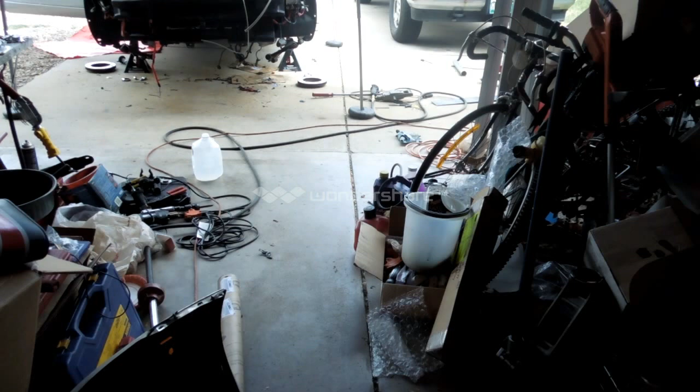So let's start getting the engine off the stand and get the rear main and everything sorted. But first I've got to clear a path, because as you can see the engine stand isn't going to get through this very well. I'll work on making a path and be right back.

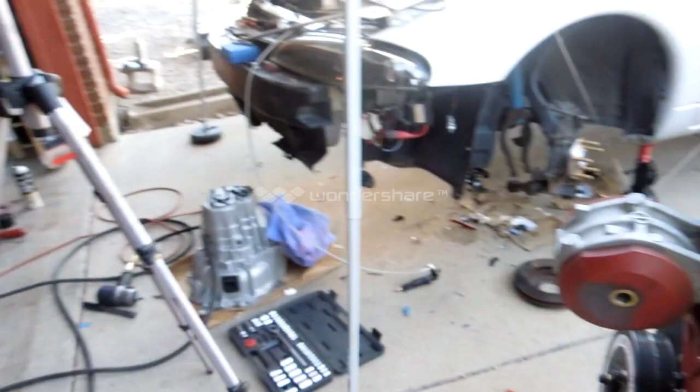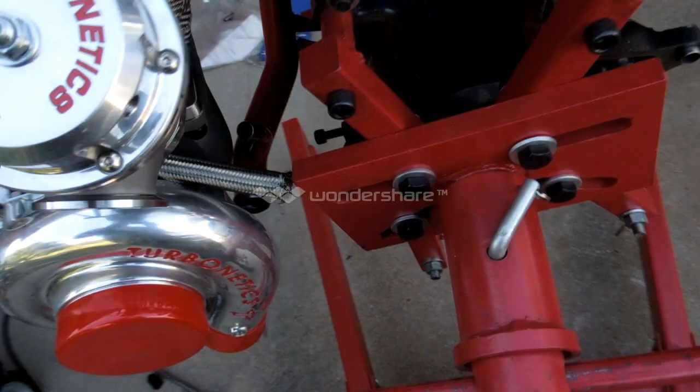Alright, it's 5:08 in the afternoon. I got the engine out here outside. I went through and did some things for the turbo, cleaned out the lines from when I made them so there's no debris, and started making the drain. I'm going to tighten or snug up the bolts for the turbo to the manifold for right now, just dropping the manifold in as an assembly as it sits. I also did some work on the vacuum line since it's going to be under pressure, adding one-way check valves here and another one for the brake booster.

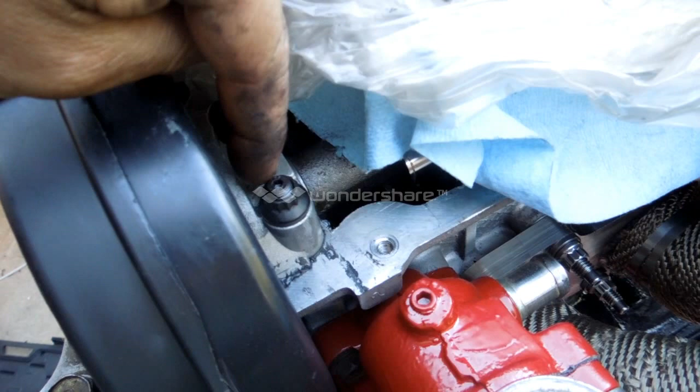What else did I do? I made sure and rechecked the tightness of all the cam tower studs. I remember I had helicoiled this one, and I wanted to make sure I torqued it to 20. The book says 21, but at 21.5 foot-pounds it started to slip, so I'm going to leave it be.

I've got to take the alternator off the other engine, and make sure the cam gear bolts here are tight. I did retorque and put Loctite on the main bolts, these two here, but I still need to recheck the other ones, which I haven't done yet.

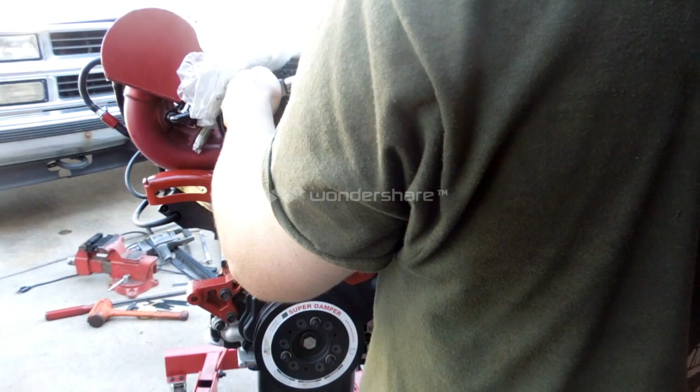I want to make sure this engine's right. The book calls for 15 foot-pounds. Looky-loo, it's a smaller one. These are 12 points, I think they're 8s, yep, they're 8s. So 15 foot-pounds, and there's 5 of these. They prevent the cam from slipping. Ooh, that one was loose. Okay.

Building a motor like this, always double check your tightness, especially on some parts before you put the motor in. I'm going to double check the head bolts to make sure those are tight. I put the mount on here from the other engine. I'm going to have to rotate this a little bit just to get that other one into clearance. There, okay, we're good.

Always recheck them, I'll have to check the tightness every now and then. The reason being, if you remember from part 23 when I did the timing, I cut the valve cover out so I can get the cam gears changed timing if I need to. But the other reason I did this is so I can keep the timing cover on. Forgive me, I said valve cover, I meant timing cover, I'm losing my focus. It's getting later in the day and I really want to get this in. Timing cover, because I don't want any rocks getting up in there and messing with stuff. So I did it this way, and it'll work nice for now.

I had to make a stud from a bolt I had for the turbo, because right here I can't get an Allen key in there with a ball head on it very well. So what I did is cut the head off, put red high-temp Loctite on it, and snug that up close to what it should be. The book says 23 foot-pounds for the turbo model, plus 65 degrees, but since these aren't torque-to-yield bolts, I'll probably go 25 and see how it feels.

That's pretty much where we stand. I'm getting ready to take the manifold off, set it aside, and then get the transmission over here. I also don't have the exhaust gasket in here either, so I'm going to have to do that as well.

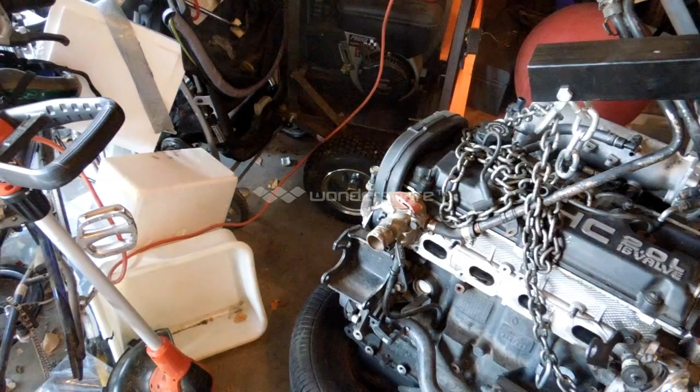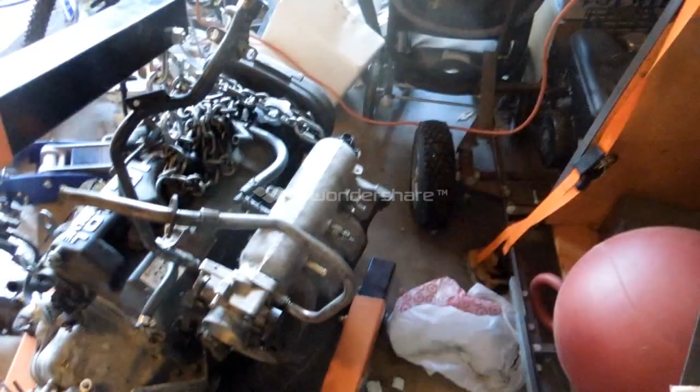Okay, so now I'm going to work on getting the alternator. So we're going to go over here. Not a very good angle. Okay, there we go.

I'm gonna need it's like a 12 or 13 ish. And right on a 13.

Okay, I'm going to have to take this sliding piece too out of this one. Belt to loosen. Nope, it's in there. Okay.

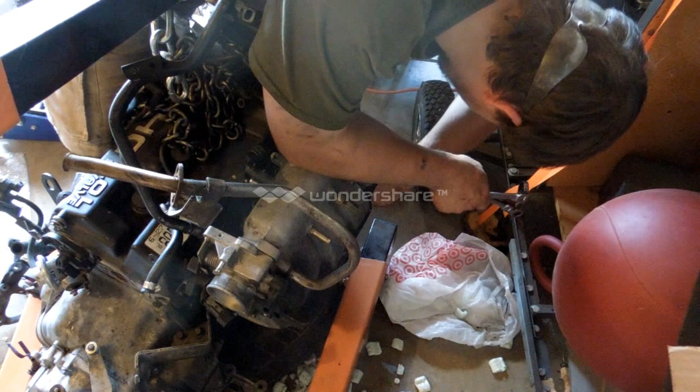Come back here, I need you. Alright, well, I'm going to focus on this other nut down here. He said nut. Mechanic joke.

That sucker's in there. Go away, Wolverine, go away.

There we go. There's one piece I need. Okay. Zap that off.

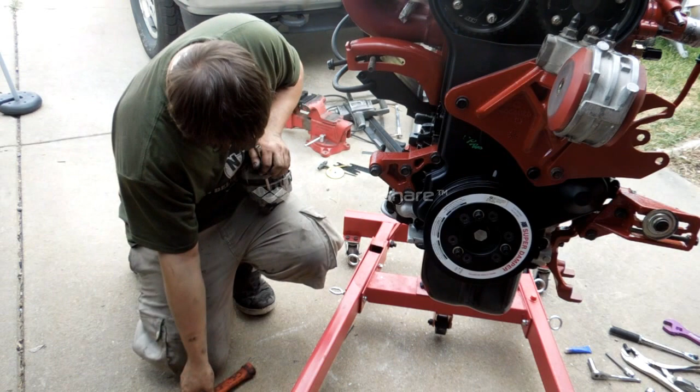I'm just gonna be careful with it because I don't want to break off the positive wire to the battery. There, that's far enough.

You see, it just fits right in there. I don't have to fight it. The only thing I probably might end up fighting is this. Nope, not even. I gave up without a fight.

There we go, there's the alternator. Just gotta snug these up. I'm gonna put the belt on now since I have a chance, I just gotta go get it. Go. Alright, I'll be right back.

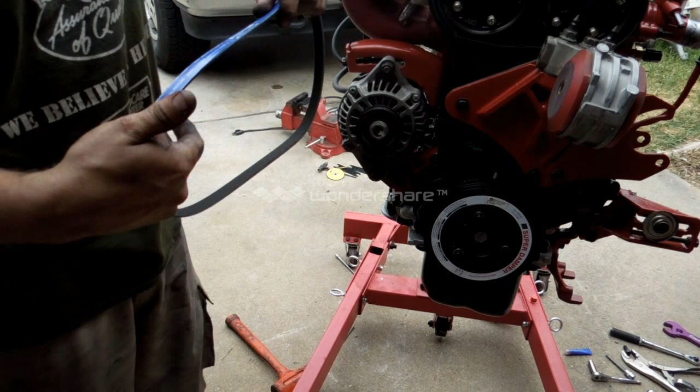Alright, got a Gates Kevlar racing belt here, much stronger. So this should fit, and the crank pulley is actually underdriven. At least it should be, unless I grabbed the wrong one. Let me check with the other one.

Gimme. No, identical. So, belt's too long now, by yay much. Ain't that pleasant.

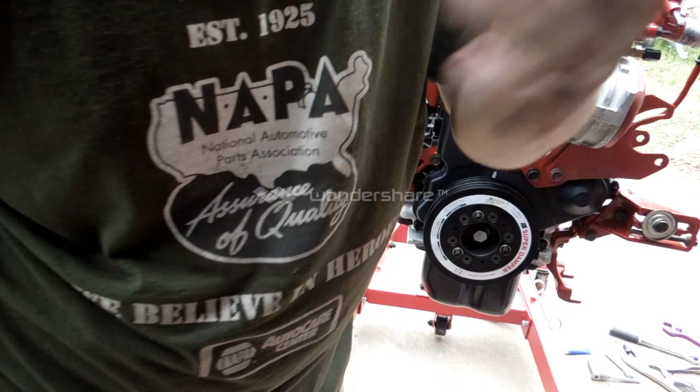What's next? What is next? Alright, I'm just gonna work out this. I'll be back. Okay, time to put the motor in. It's time to do this.

Em, can I get you to stay on this, please? Please? Stay on it, please stay standing on it. It's just to help balance the weight out on it.

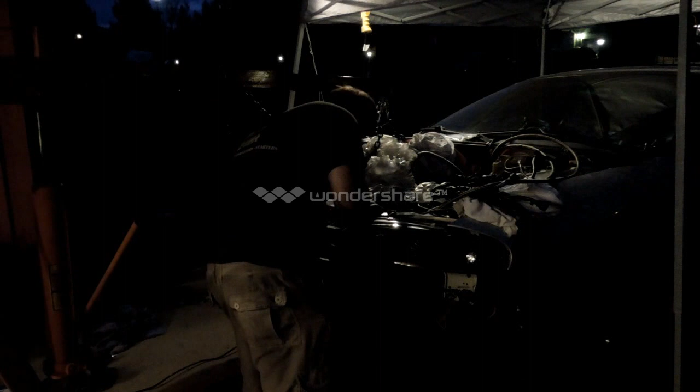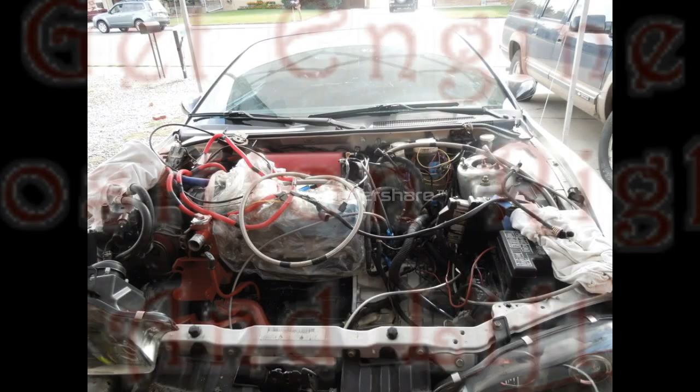It's Saturday, August 7th. I was up real late last night putting the motor in. I finally got it in. I've got to go around and tighten the bolts on the mounts more. Couldn't use the impact, it was like 11 o'clock at night, so it's in. I've got some loose ends I need to button up. Pretty much today it's going to be the valve cover, ignition coil, battery, starter, cross member. I've got to go find a different belt for the alternator so I can have at least a charging system for now.

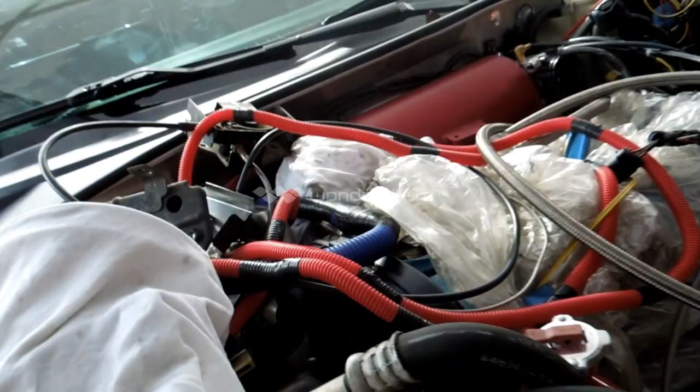I ran into a snag and the manifold was hitting. You can see where it was hitting, the cable box for cruise control.

But the video where I put the clutch on is gone. Battery exhaustion, and then it said no file, no image on file, so I'm not happy about that.

I guess we'll just have to get to it. There's some vacuum lines that need to be hooked up, need to get those done here. Alright, we'll just have to get to it.

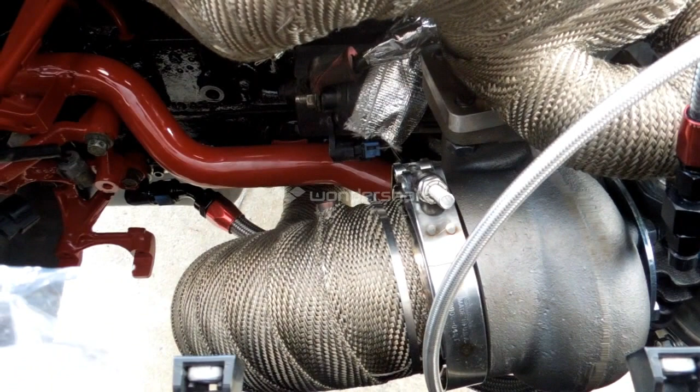Alright guys, it's the afternoon of Saturday. I've got the turbo on, mounted, bolts are torqued. Figured out a way to do oil drain without doing the sump pump, but we'll see what that does. It should work, hopefully, because there's not much resistance and there is a slight slope to it, so that should help.

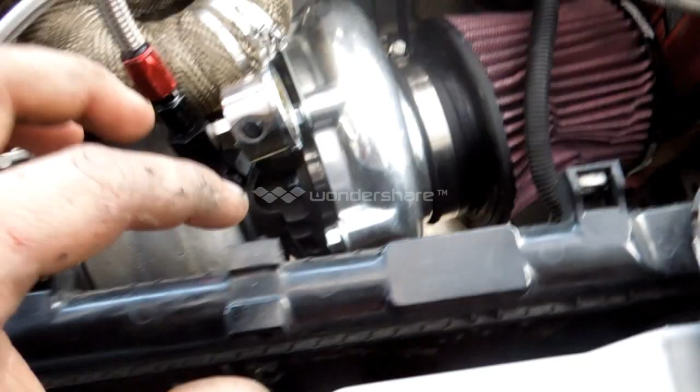I have to go back to the factory radiator. I was going to use a Mishimoto radiator, but the core was about yay big, and it wouldn't sit down in the mounts, bottom mounts at all. So I'm not happy about it. I specifically told the guy who made the manifold that I'm using a 3-row core, so I don't get why that wasn't taken into account. Then again, he's really forgetful, so I think that'll be the last time I ever use him.

I've got the air dam off and trying to fit up the radiator fans. I get one on the driver's side, but the passenger side I can't, I gotta get a smaller one. Pretty much this is a dead in the hole project right now until I can get different parts, trade off some parts or something like that.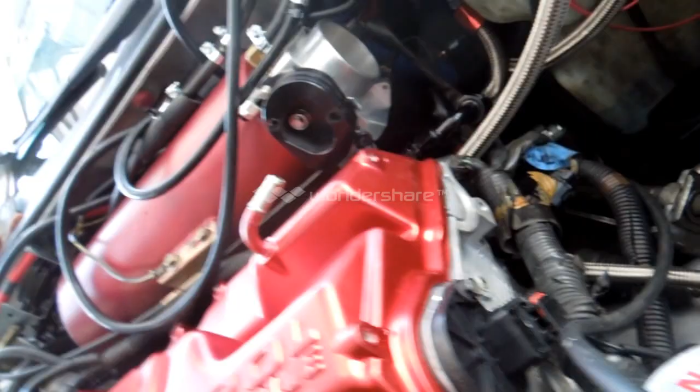I'm gonna have to modify the cruise control box there, I think I already mentioned this earlier. Most of the wires are ran and hooked up, except for a few. I gotta put the axles in and find a way to get the wheels on, just so I can get in the garage tomorrow night.

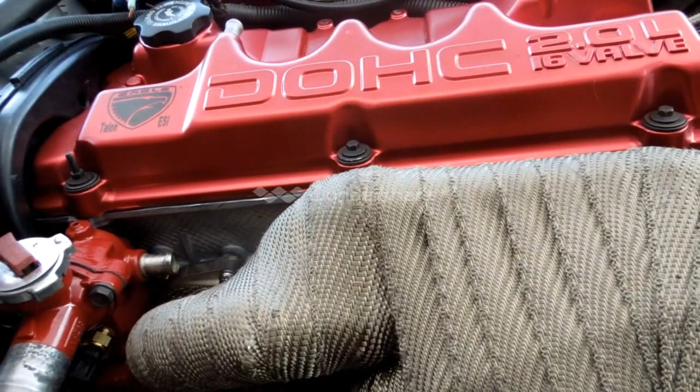Other than that, I'm pretty much done for the day. Valve cover's on. I'm really tired. My vacation's pretty much over, so this is just gonna have to be something I work on every night after work. But for now, I'm just giving up.

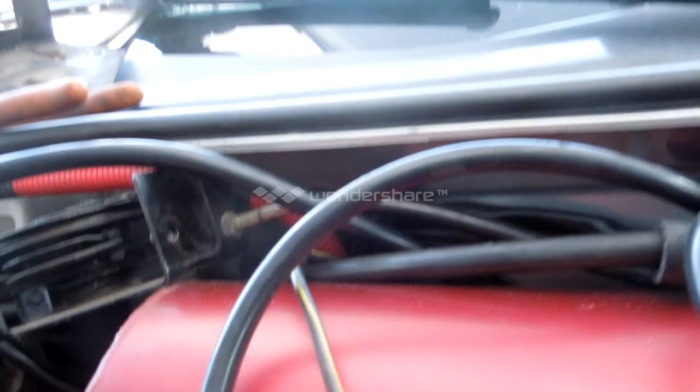A lot of things have gone wrong this past week, and I'm not particularly happy about it. Just seems everything I try to do always goes fucking wrong.

But you can see there's the starter. It's a real tight fit in there. I have to figure out a way to put some heat protector. I still have to put the turbo blanket on, amongst some other things.

This will be something that won't be driving anytime soon, so I was hoping to have this all done before Colorado Mile, but at this point it looks like I won't be able to make that at all. Not unless I take this down in a trailer and only run it for short periods of time without cooling or something.

So that's where we stand. I'll tinker a little bit more tomorrow, but I'm really tired. I've been up till midnight every day trying to do this. It's just not working for me real well. So, alright, well, I'll keep you guys updated.

Alright, it's Tuesday. Last night and Sunday I did some work. The axle kit I had, it turns out it's not correct, so I'm not happy about that. I had to find another factory hub and put that on so I can get this mobile to take to the exhaust shop tomorrow. I'm going to try to do the intercooler stuff tonight, hopefully that'll work, and then do one or two more wirings, hopefully.

But for now, let's prime it. Every time you do a new motor, brand new, refreshed, and you drain all the oil out of it, you gotta prime it. You have to prime it. If you don't, you may just seize the engine that way. It won't be good for it.

All I'm going to do is just touch the starter solenoid to power, and it should crank it over. I didn't put the plugs in yet, or the wires, just to help it crank over. Make sure that the car is in neutral too, and don't have the power on.

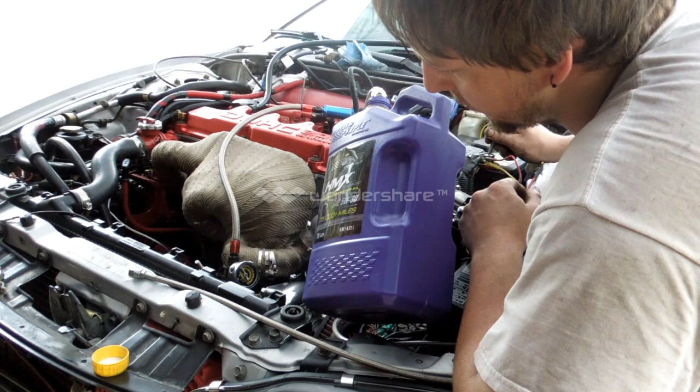Okay, I did bleed the clutch somewhat, but it probably won't be enough, so I'm gonna have to have help with that later. Here we go, pick one. Let the starter cool off. Right now I'm checking the turbo for any leaks. I'm waiting to see if this gauge comes up on the turbo.

Something's making a funny noise over here. Let's check this.

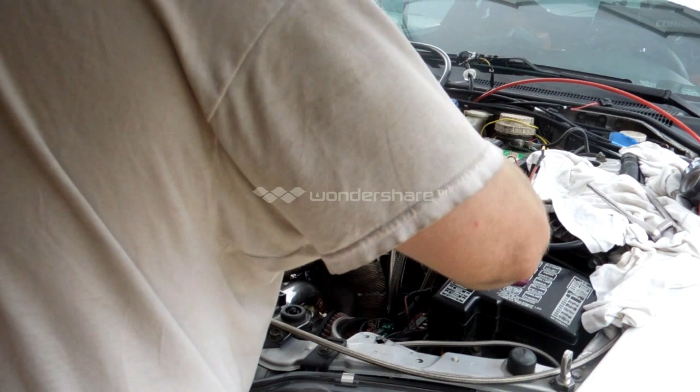Once I set this, I'm going to check for any leaks after I cycle it a few times more. I'll get this on here. I'm going to set something under it to catch anything if it does leak, because below it's not something I want fuel on.

Okay, fuel pressure is too low. Checking for fuel, possible leaks.

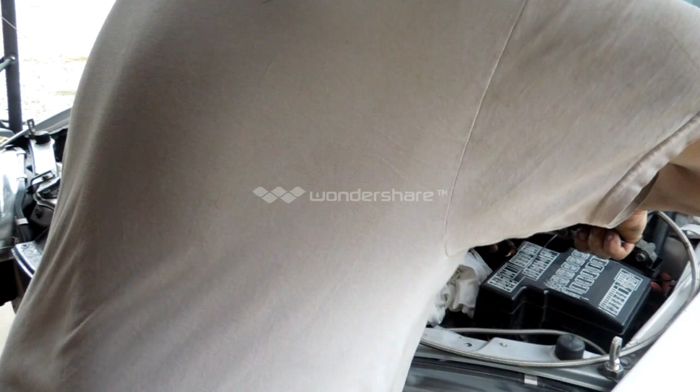Okay, so now we've got the fuel where we want it. And now I've got to calibrate the wideband.

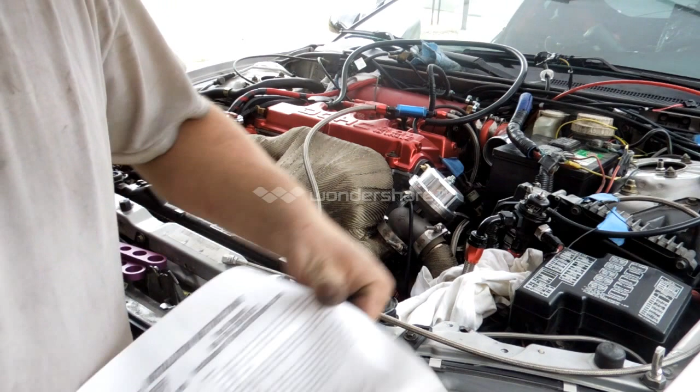So I'm going to go to the controller and press the button. Okay, so the sensor's calibrating. So now I'm going to come over here and we're going to hook the laptop for the piggyback up. Try to get you as close as I can so you get a general idea of what's going on here.

Okay, so the sensor for the O2 is calibrated.

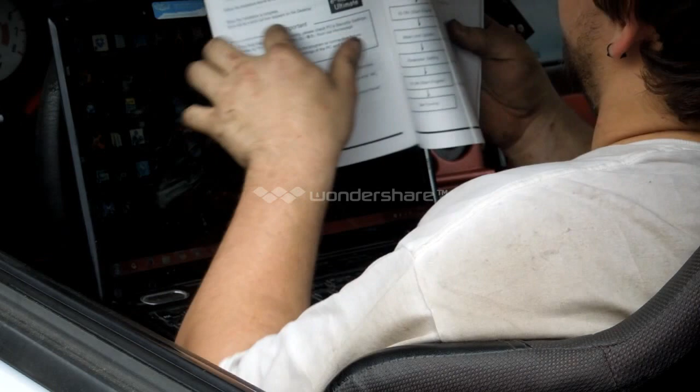Okay, which manual is it? This one, Japanese, English. Okay, so instructions say it's also ignition on main unit, ignition on. So I'm going to start the program.

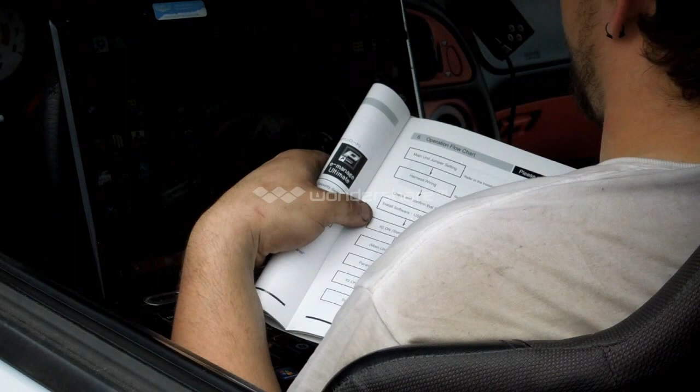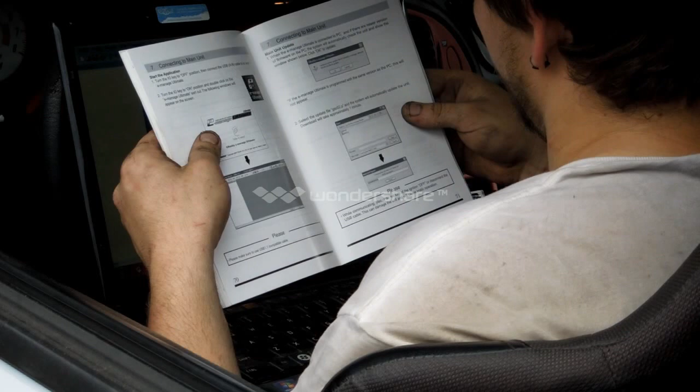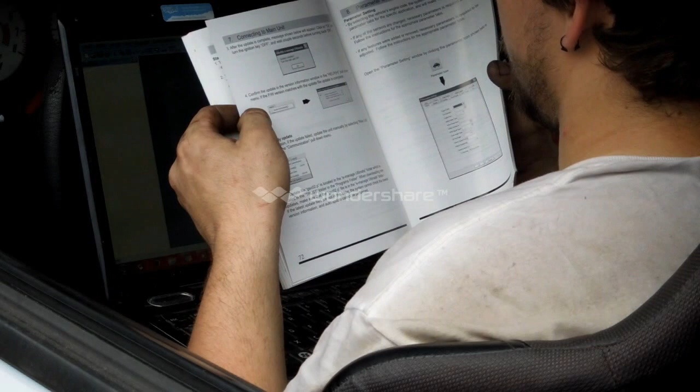This might be taking a little bit.

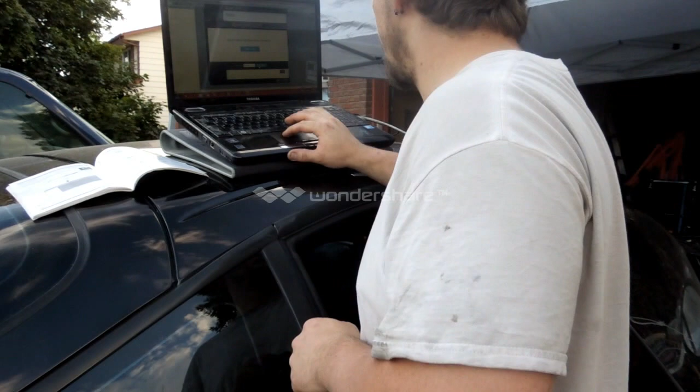Alright guys, it's about a day or two later, it's Thursday. I finally got the computers to communicate. There was a driver that was missing, and I finally found the driver in the program, the actual eManage Ultimate program, in the program files under pre-install. You have to pre-install the driver in order to get it to communicate. So I've got it working now.

As you can see, I have it on, and you can see in the bottom corner it says online. So today's the 11th, so what I'm going to do is go ahead, open up the vehicle, skip that. Okay, so as you can see where we are with this, so all I'm going to do is...

I'm going to go around and tap the throttle from the cable, from the throttle pedal. That should give me an accurate reading of what's actually going on. Zoom in so you guys can see this actually happening. Focus, okay, so you can see where it is now.

So throttle all the way down, all the way up. You should see min, max, and where it is now. Click apply.

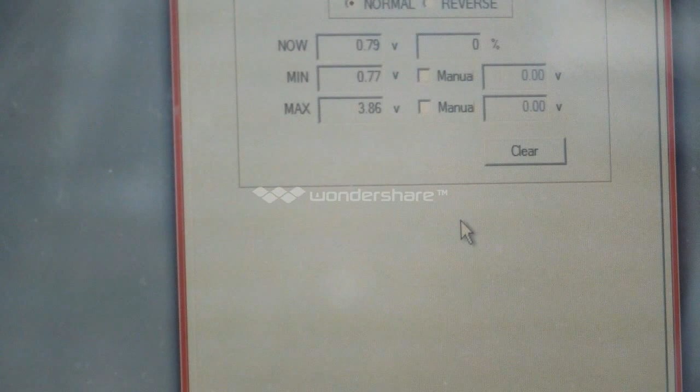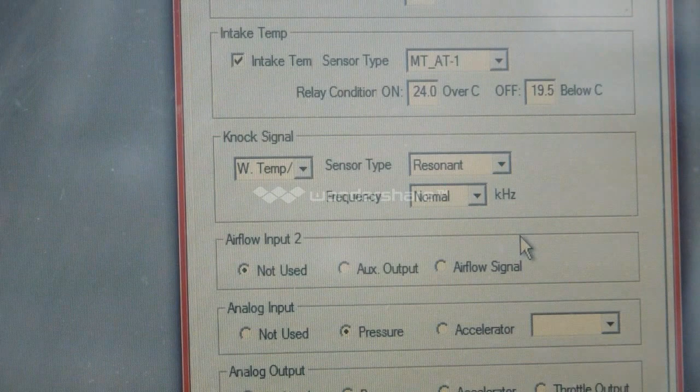Okay, so channel settings, intake temp, knock signal, apply. Not used, analog not used, analog output not used, apply.

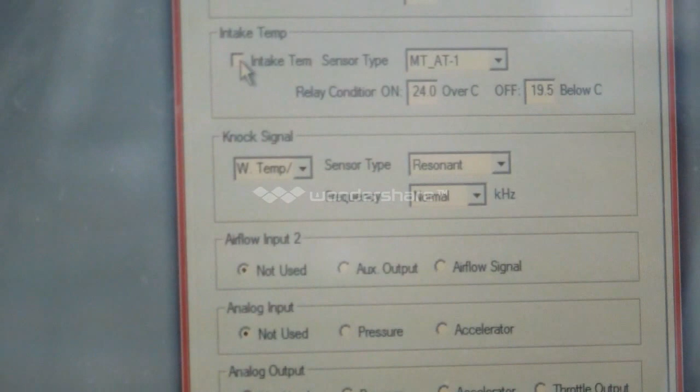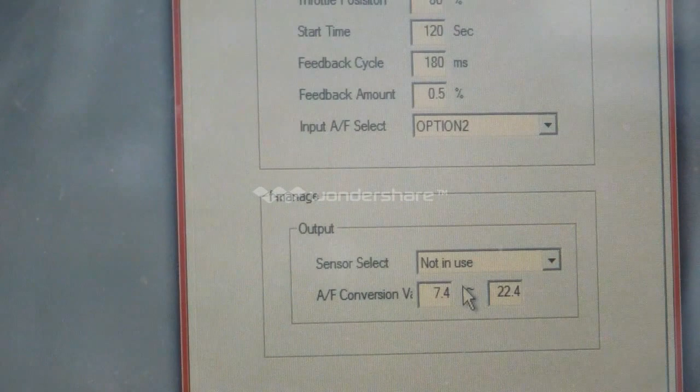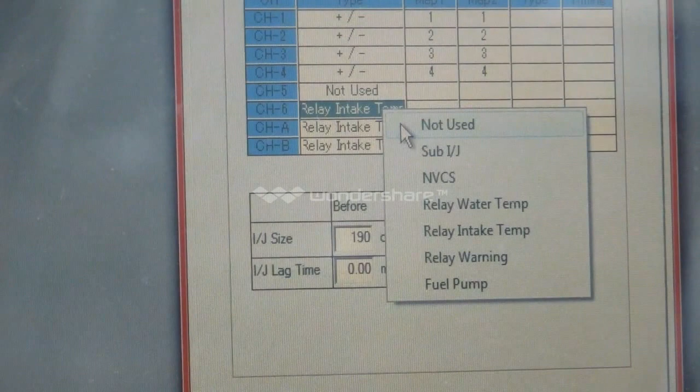Injectors. I'm going to go ahead and tell the computer that these are not used. I was going to use relays, but I decided not to.

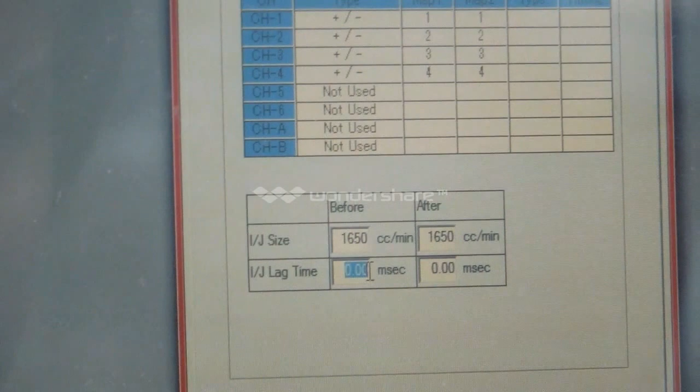So, 1650. Lag time, let's say I'll leave that alone for now. Put start.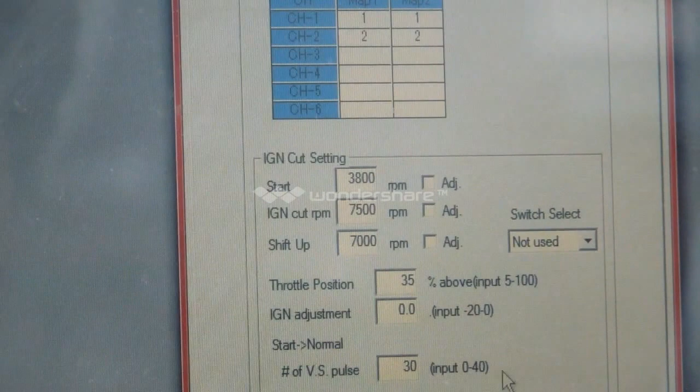Trace, map select, main logger. Okay, so we're ready to go. Injector map number 1.

So I'm gonna screw with this here. Okay, so here we go. Shot number 1.

Of course, the battery has to be low on charge. Okay, so, positive. Okay, let's find the ground.

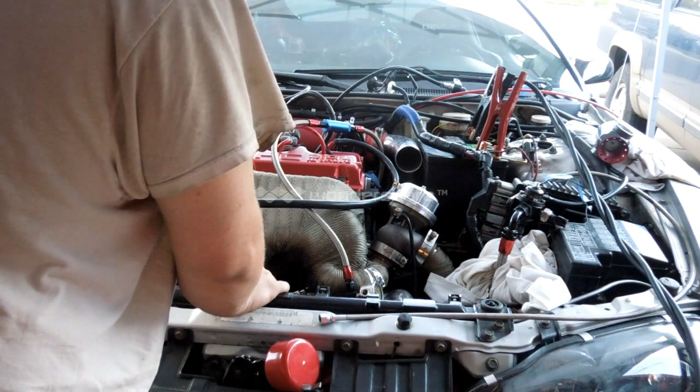Let's connect it. Okay, so... I smell fuel. Wow.

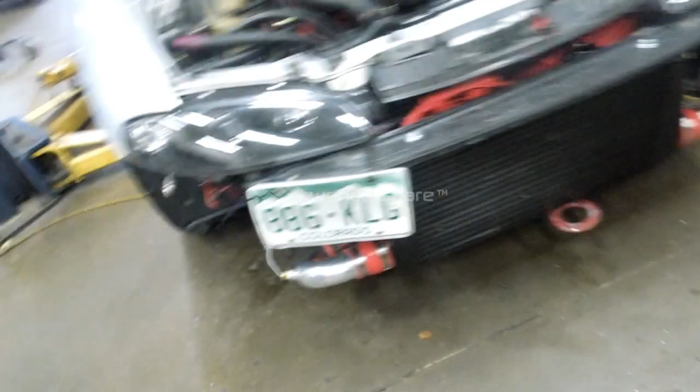Supposed to be at the KBPI show today but didn't make it because I had a lot left over to do. And she's running, you can see she's running. So there's a couple things I don't like, I'm gonna have to do. The intercooler piping on the passenger side's too low, so I've got to do something about that. I broke the radiator inlet, so I've got to get another radiator, and I'm still dealing with some overheating issues, but she's running, so thankfully, hopefully it'll be downhill from now.

Alright guys, a small update. It's September 7th, 2015, it's 9:46 in the morning. The car has took a nosedive for the worse. On September... I want to say it was August 30th, the car was running, I was doing some more tuning, and then it was at an idle, and then all of a sudden it stopped running.

The Woodruff key in the crankshaft vibrated out again, I don't know how, and sheared off. I think partly because the crank gear was a little too loose on the crank. Took the key out, and then there are some good grooves in the pistons from contacting the valves. I got a new gear and Woodruff key, retimed it, did a compression check. The valves are completely bent, there's no compression in it whatsoever, so I've got to take the cylinder head off, redo the valves, get a closer look at the dents in the pistons, make sure there's no holes. I put my borescope down in there, so that's how I know the pistons are damaged.